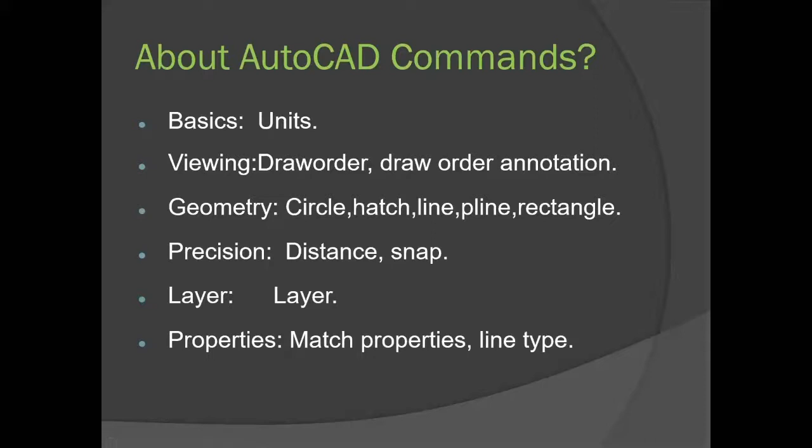These are some commands once you are used to with this software.

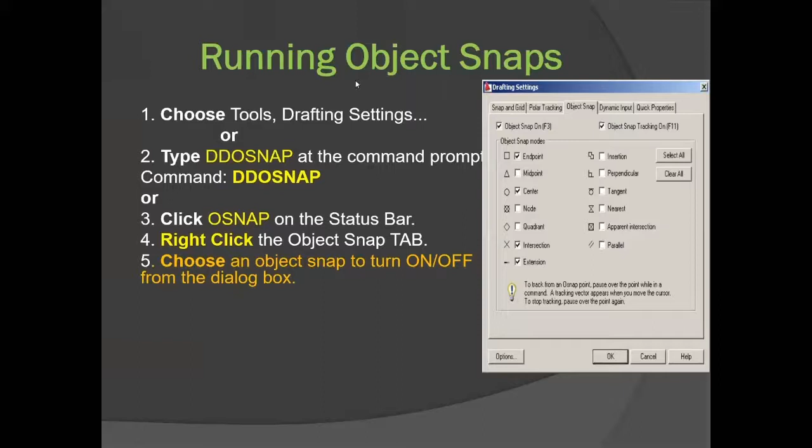Grid lines, sometimes we want to turn them on or off. I'll come to the exact software and show you. Meanwhile, you can text me in the chat box or note down your doubts, and whenever we come to the live mode examples, you can ask me.

We can set up our drawing units initially. Even in between we can change it, but it's always preferable to do it before starting the drawing.

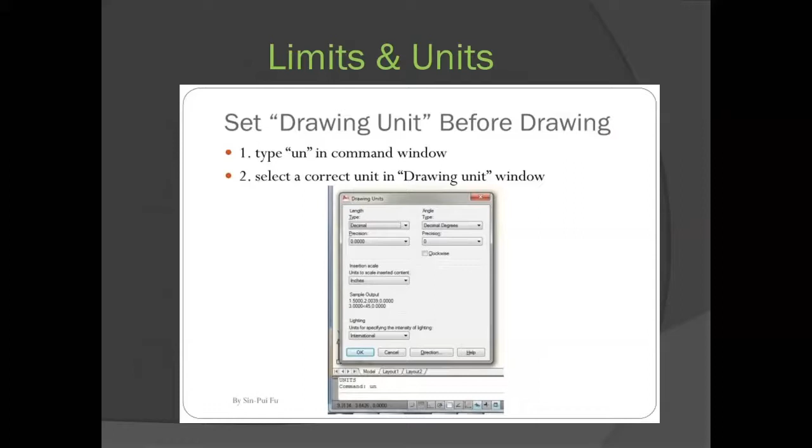So these are commands, as I said. For line, you just need to type L. For circle, you need to type C, this kind of stuff. If you want to come out of any command, press the escape button. And if you want to repeat any command, just press the space bar - the latest command will be repeated and executed again.

So have a look at these kinds of things. I will show you the live examples.

There are two kinds of coordinate systems. One is the user coordinate system, the second is the world coordinate system, which is the standard form. And in the previous slide, it was...

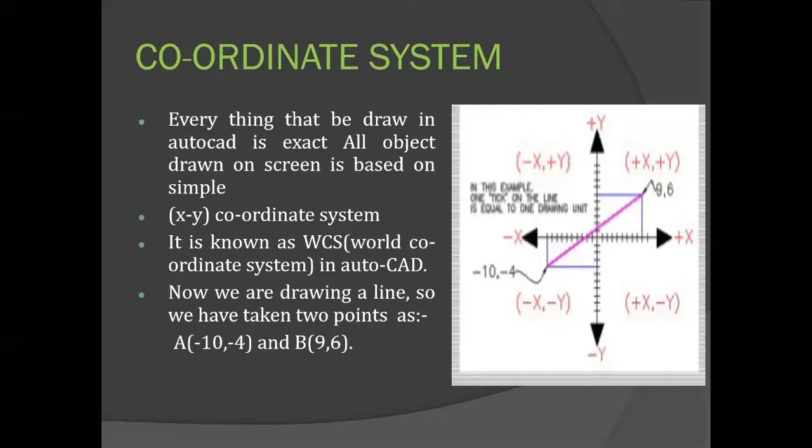There are various modes of input through which you can draw your line - different methods like relative coordinate, absolute coordinate, polar coordinate system, circle command. I will cover these things once I come to the exact examples, and then I'll be back to the live software.

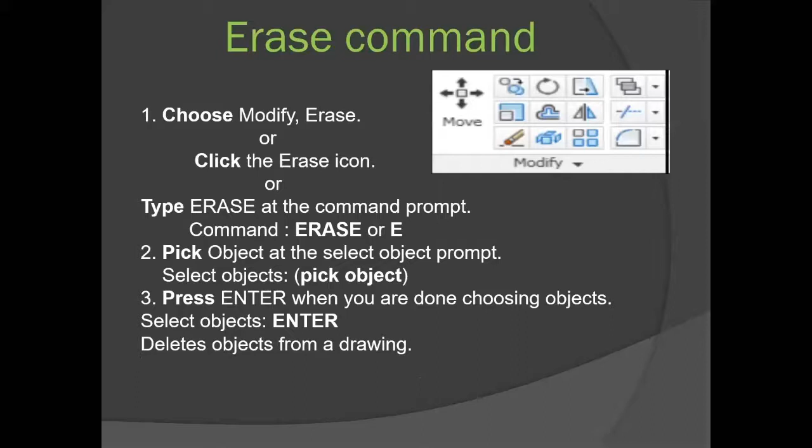You just see what all you can do. You can do mirror, offset - I mean, at some distance, again you want to repeat some drawing, then you can do offset. Extend command - there's some line and you want to extend up to some point, then you can.

Sorry, there was some technical issue. My internet connection got disconnected. Okay, okay.

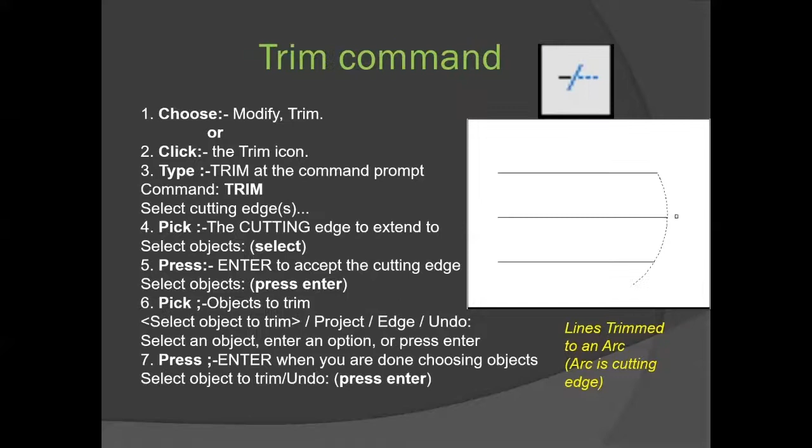So just have a look what all can you do. Move command, rotate command, or even trim, rotate, chamfer, which we use at corners and edges.

Fillet command, explode, like you have drawn a rectangle and these all four lines are connected, but at some point you want it to be disconnected, then just type explode. These lines will be counted individually, it will not be a closed line.

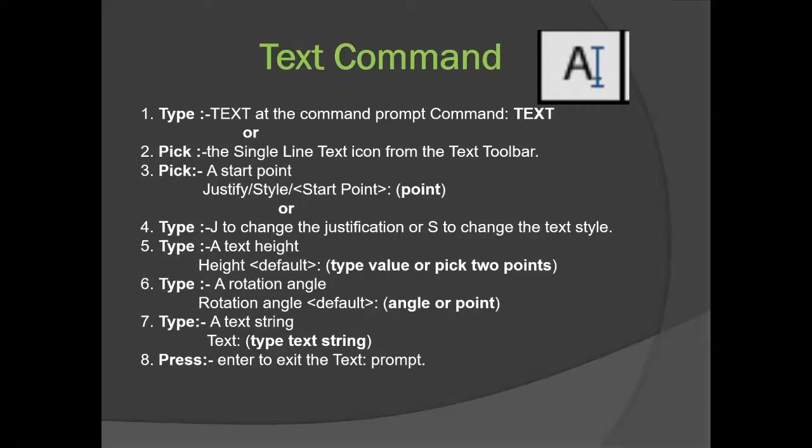Break at some point will create a gap. Text command, like sometimes we want to represent something, write nearby or add representations to make it clear.

Dynamic text also, it is fixed with that specific line. I mean, whenever you move that, it will be associated with that.

Hatch command, like you have to fill some material, then for representation we use hatching. Also we can edit that hatch.

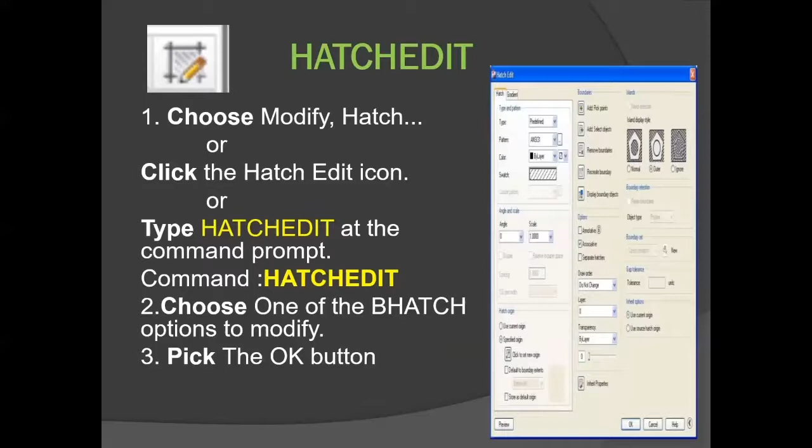Layers are nothing but, you can say, a drawing mode. Whenever we switch to another layer, within that layer we can specify dimensioning style, line style, viewing style, color. So suppose you are drawing 2 or 3 different parts,

then you should try to put each part in a different layer, so that whenever you need, you can put one off and another on. Whichever parts you want, you can put it off or on, I mean visible or invisible.

So also for appearance we can use this kind of things. That's why we use it, to create different layers for different kinds of things.

Like we have to put some hidden line, dash line, continuous line. Even for that we used to change our layers, so that all center lines will be red, all hidden lines will be black, these kind of things.

Then we used to have layers, just turn the layer on, turn the layer off, but initially we need to create that layer.

See, this is an example. You can have a better understanding.

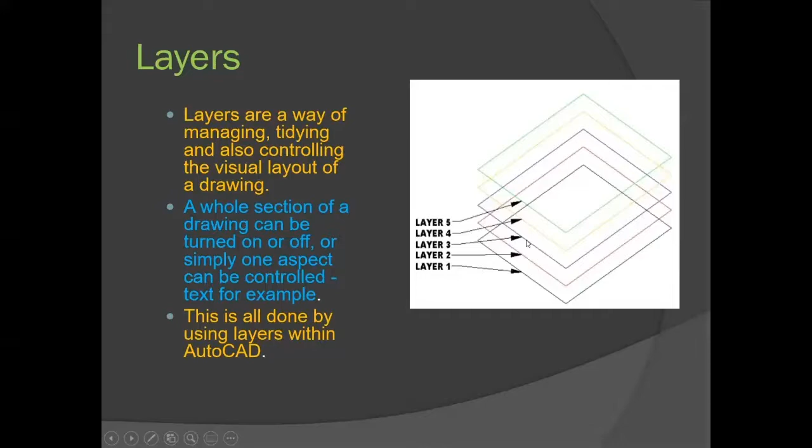See, with different lines there are different kinds of things we can set. Color, even the line type we can change for different lines, and from here we can turn it on or off.

Within the layer we can do a lot of things, as I explained you. Color, you can change the look or background color, or your image color, drawing color.

Blocks are nothing but, like suppose you have to use some standard things very frequently, then you draw that thing and save it within the AutoCAD software. And whenever you want to use it, just extract that and use it.

You won't need to draw it every time. Just save it and use it every time. So those things are called blocks.

Few blocks already come with this software, like nut bolts, because they have standard sizes. So those standard sizes come with the software, and if there are some differences, you can create your own block.

From the measure command you can measure the distance between 2 points. Like you have a doubt that someone sends you a drawing and that drawing has some different dimension, but it is written something different, because few people used to do that.

Just by editing they change the dimension, although indeed it is something like 3 centimeters, but it is written 4 centimeters. So to avoid that kind of confusion, you can directly measure it.

I mean area, volume, weight - if you are giving dimensions and density like things, then you can calculate all the properties.

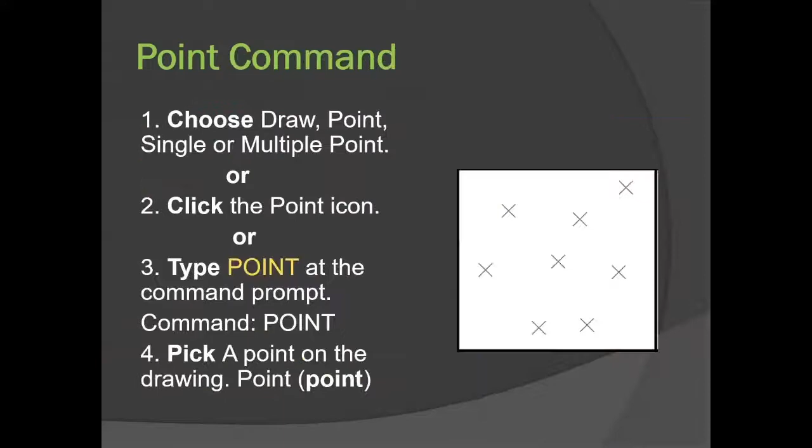These things come under styling. We'll tell you, if you have a detailed session, then in that session we will be telling you about dimension style, in which format you want to put your dimension - horizontal, vertical, or aligned with the lines. So all these can be changed.

Exporting, importing, plotting commands.

Okay, let's come back to AutoCAD.

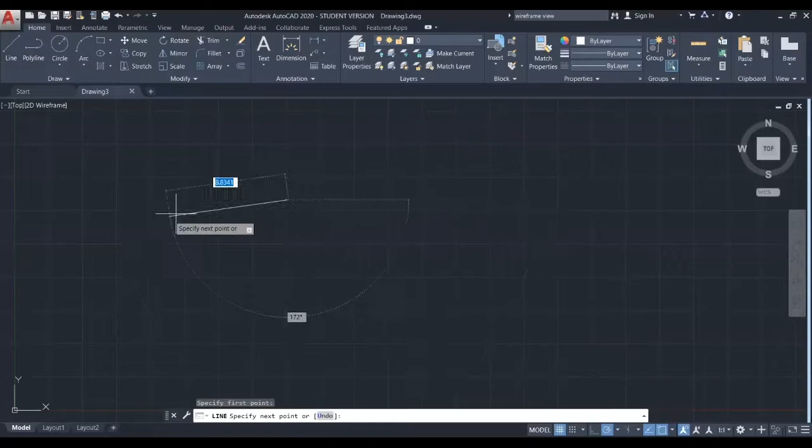Okay, the second thing is ortho mode. In orthogonal mode you can only draw either horizontal or vertical lines. Let's start. See, for now I can draw anywhere. When I want to draw a free line, anywhere I can draw it.

But when my ortho is on, see, I am pressing F8, shortcut key F8. This is the logo, this is the representative toolbar. Either press F8 or type 'ortho' and turn it on or off. When ortho is on, see again I'm drawing the line, but it will either go vertical or horizontal, not in between. Even as I'm placing my mouse, it is not accepting that. It is either accepting horizontal or vertical, not between these. Again, when ortho mode is turned off, see here, it is turned off.

Then I can draw anywhere. See, anywhere I can draw, horizontal, vertical, whatever.

Now there are different types of modes of input. You want to put some point like polar coordinate system or relative, absolute, these kind of things. So like when I want to draw a line, suppose I can either place it with the mouse, or if I want I can directly give a coordinate. Suppose I have selected this line.

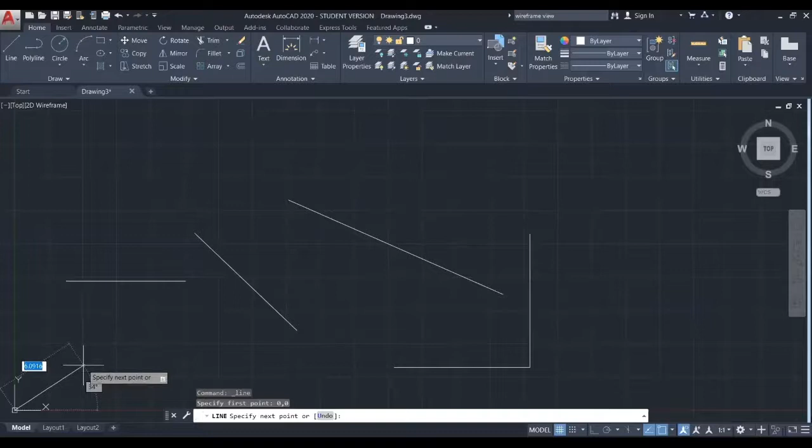Okay, then how to enter the coordinate. So it is saying specify line's first point, so I can say, just for your reference, 0, 0. See, it has taken the first point of the line at 0, 0. Again I am giving the next coordinate like 10, 10. So it is taken here. You can see this, 10, 10.

Again suppose I am saying 10, 0, meaning in the x direction 10 units and in the y 0. Mind it, these are all absolute coordinate systems because I'm not putting the at-the-rate symbol. So it will go to 10 and 0. See, this is 10 and 0.

Again, now I am entering the polar coordinates. So 10 at the angle 90. Okay.

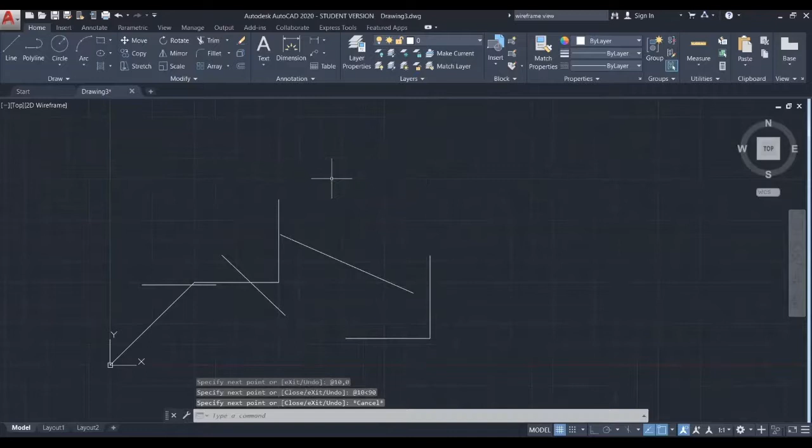There are two types of selection. One is from right to left. When you are selecting from right to left, whatever objects are touching that selection area, all of those will be selected. But when you are selecting from left to right, then whatever drawing is completely inside the box will only be selected. So this is the difference. If you are selecting from right to left, if it touches any segment, that will be selected. But when you are selecting left to right, it will select only if it is completely inside the box. Even if it is outside a little bit, then it will not select.

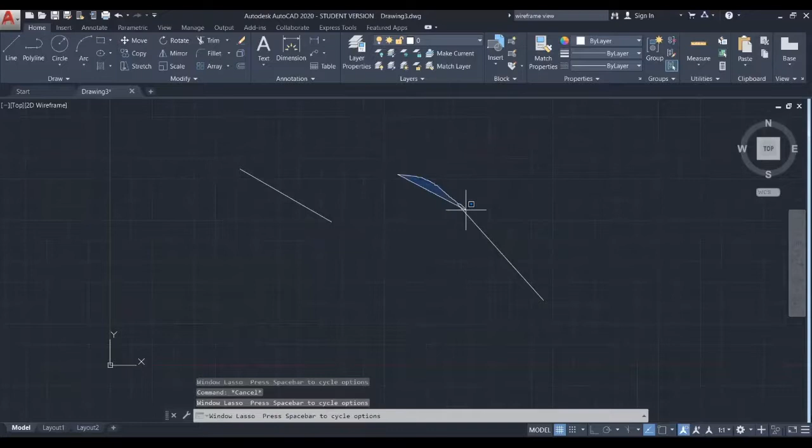See, it is not selecting, but if I'm doing like this, then it is selecting.

Let's start with some drawing models. So start with this. These are different viewports, like from top view, side view, and this one is the 3D model.

So for this 3D model, we can have these dimensions. This vertical thing is the top view, so this side is 2 and the length is 3. This face view is this one, so the height is 2 and this length is 3. So let's draw two lines with 2 and 3 units.

I will go to the line command and start with any point, and then I will draw this 3 at angle 0. Only the line. See, this is the 3-unit long line, and then this height we can switch to this image.

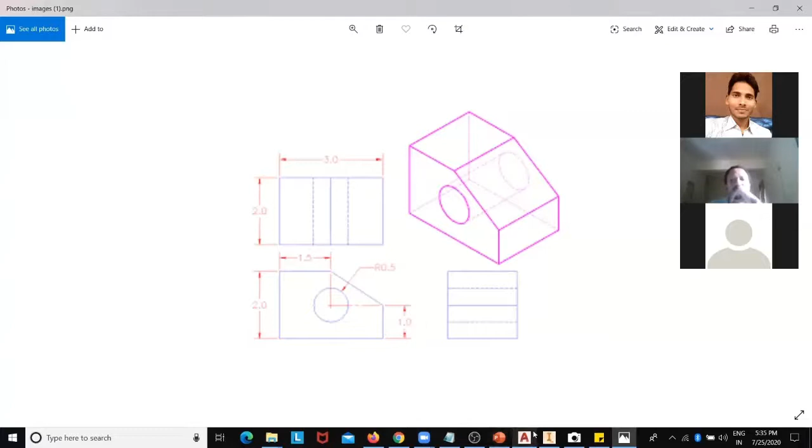So in this image we are drawing, this height is 2, this is 3, and this one is 1. So I'm drawing that. This one is 3, and then this one is 1 at rate 1, comma, angle 90 degrees.

This is snap on, that's why it is taking already that line point. If snap is off, then it will not select that point. So I will select this point, relative coordinate system, length is 1, angle is 90 degrees. Okay, I will terminate this command here.

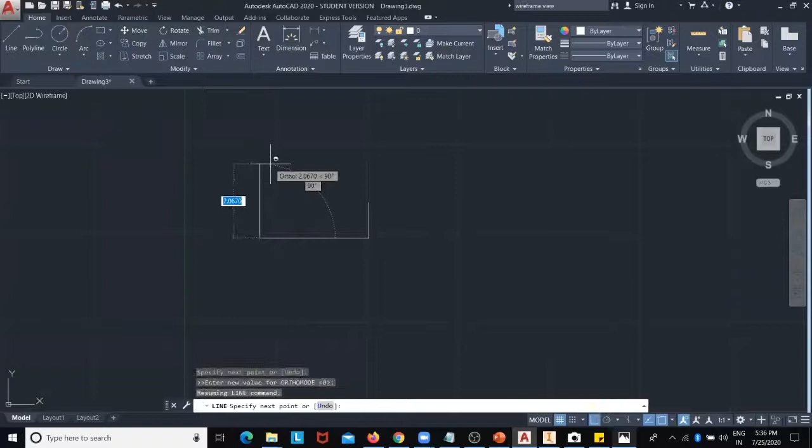Again there is a command, a line with length 2 units. So I will just select this point, again relative coordinate system, at rate 2, angle 90 degrees. See, and this length again we will switch to this, and this length is 2. From top view this is coming.

So sorry, this length is 1.5. So at rate 1.5, angle 0. Okay, and match this point. Okay.

And the center of the circle is at 1.5 centimeters from this side, and from bottom it is 1 unit. There are a lot of ways you can go through that. The simplest is I can just draw a vertical line and a horizontal line from here in ortho mode. So F8, ortho is on, and then draw a horizontal line.

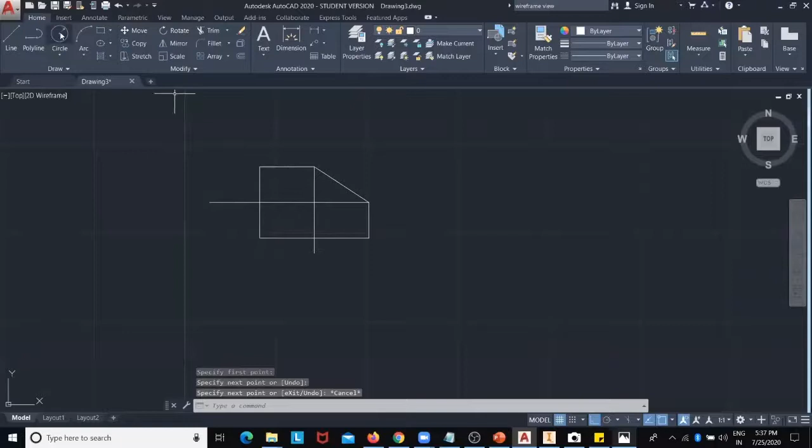Again repeat the command, and from here draw the vertical line, and then we can find out the center. Draw the circle. This is snap. Let's repeat. When I'm putting the snap mode off, see, I'm pressing F3. See here, object snap is off. Now, whenever I'm in the command, it is not accepting, it is not popping up that point. But when I'm pressing F3 again, see here, OSNAP is on, and now it is accepting that point.

So I have selected that center point, and diameter is - refer to that image - diameter is 1, radius is 0.5, so diameter is 1. See, and now we can delete those lines.

So this 2D image is ready. Now we can extrude it, then it will be converted into 3D. Just type here extrude. No.

Before that, we see our lines are independent. These are not connected. So we need to close it first, because we can extrude a closed entity, not an open entity. For this, we can edit polyline. To edit polyline, the command is PE, polyline edit. Select any line, and then enter. Turn into one, yes, Y, and then what you want to do - so we want to join it, and then select all the lines you want to join into one. Selected. So all are selected, and then just press enter, either from mouse or directly press the enter button.

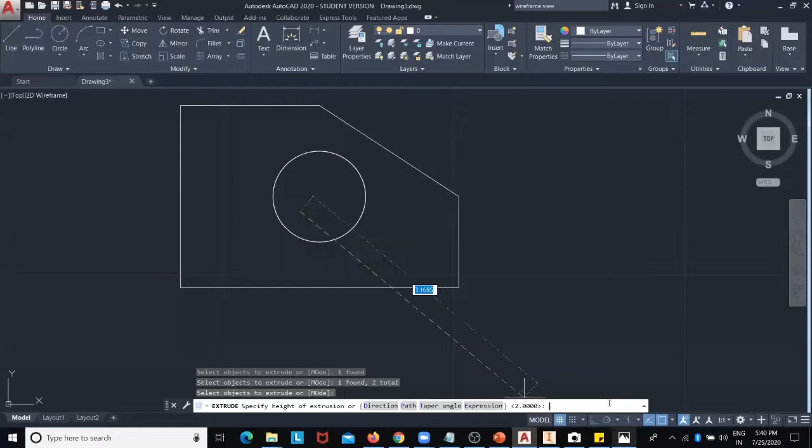So it has been extruded, but to see it, you have to rotate it because it is in the top view. So only this view you can see. From here, you can orbit, I mean rotate it, and you can have a wireframe model of this 3D drawing.

If you want to change the viewing style, then just press here. See, for now it is wireframe. Wireframe means it is representing the edges with a wire line. So click here, and have a realistic view. In realistic view, you will see like this. Okay, there is not a hole.

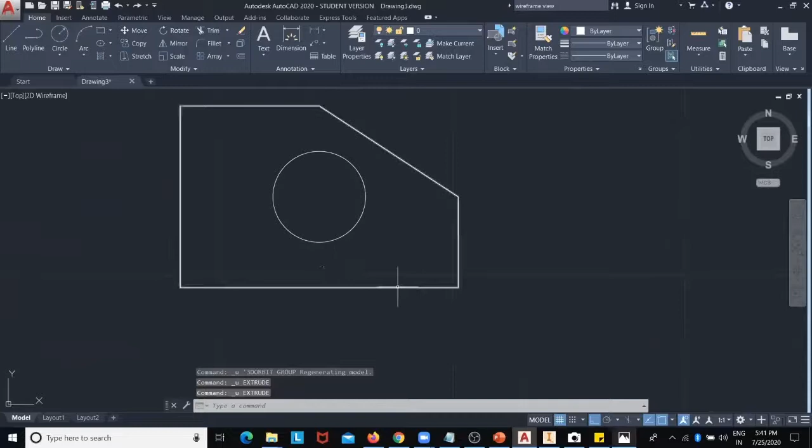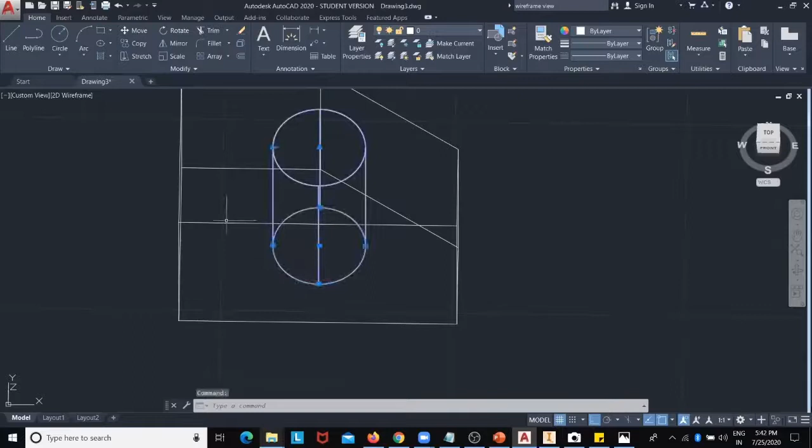So, extrude, and then extrude this one again. You can subtract this extrusion from this main extrusion so that you can have a look like a hole in this. For now, we have added, we have not subtracted.

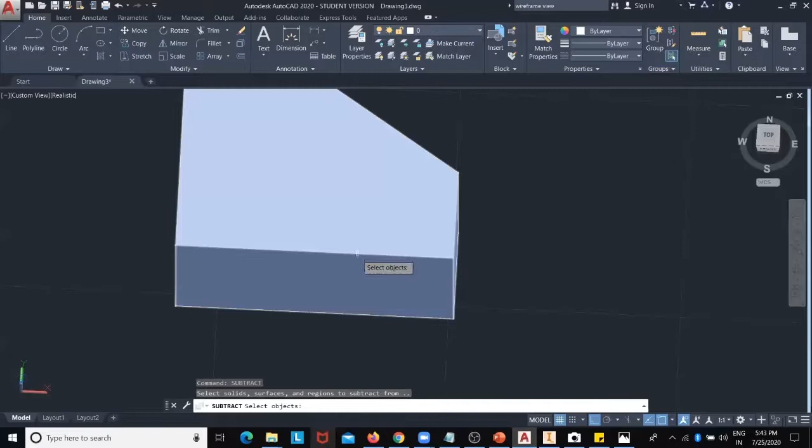So subtract this extrusion from this one. Select solid to subtract from. We have to select first the bigger one from which you want to subtract. So from this we want to subtract. Now select the region which needs to be subtracted. So this one is to be subtracted.

Now you can have a look. It has been subtracted. You can change the viewing style from here. You can have a shaded look. You can have a conceptual look. Different kinds of views you can have.

Now, if you have any doubt, you can just ask me. Of course, we're not having a detailed session, I'm just introducing AutoCAD to you. If you are all interested, we can have a full lecture series on this. If you have no doubt, I can tell you a few more commands.

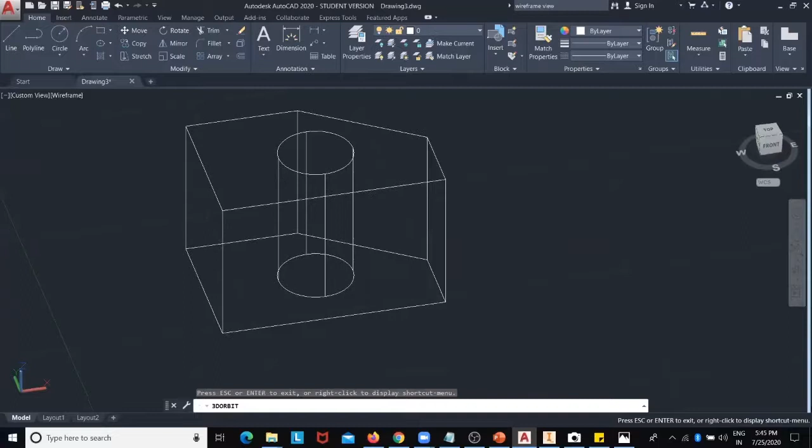When you are saying the layers of 3D printing, that is a different thing, and layer in AutoCAD is a different thing. If you are talking about people using this program to make 3D structures in realistic printing scenarios, yes of course, this is a 3D model, and you can get it printed. For that, you have to export it in some different format. So from here, you can export it.

Let me see. And for 3D, as far as I know, you use the .stl format. Yeah, see, this is the .stl format, stereolithography. So from here, you can export your drawing into .stl format and just go to the 3D printer and hand it over. They will give you the printed version.

Even in this, there is some different kind of selection, like high density, low density, a lot of things. So those aspects are different aspects from 3D. And if you are talking in terms of a layer, even then you have to draw in a different mode, because if you have drawn it in a single layer mode, it will not put different kinds of stuff in various layers. All this thickness will get printed in a unique fashion, it will not change like you want the density or pattern to change after some distance. For that, you have to put two layers at the same point, then it can be done.

In AutoCAD, a layer is like having different entities in different modes, like color or line thickness. Suppose I have to put a rod shaft here, then obviously I will try to put that in a different color, different material, these kinds of things. So I will try to draw that shaft in a different layer style. This is basically layer in AutoCAD. Okay, thank you.

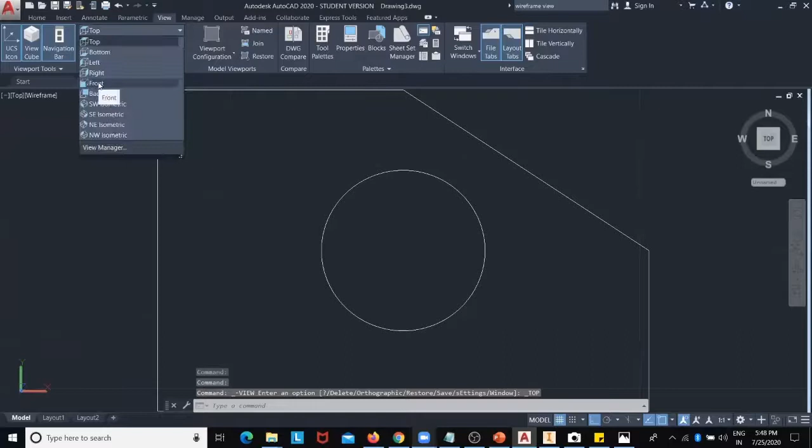Someone has asked about the views. From here, just go to the View menu, there is direct access here. From here you can select top view, front view, bottom view, whatever you want, and have different views.

There is a command viewport, like if you want to print something and give it to students, we use it on the same sheet at specific locations for the front view, top view. So this is a different thing.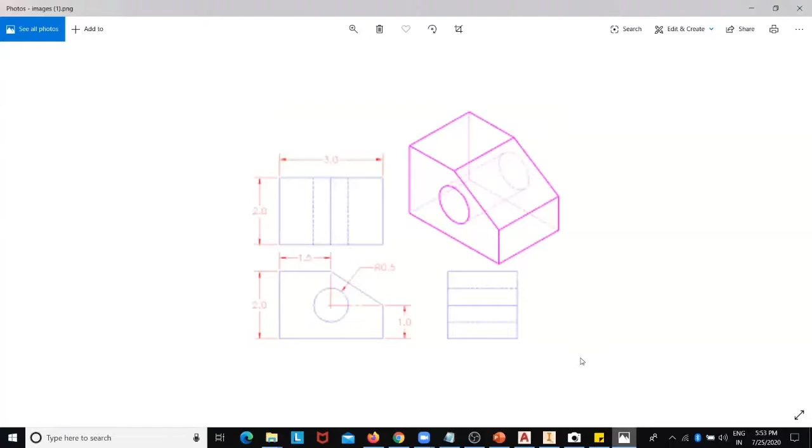I think this one is simple. Can you see this? You can try this model.

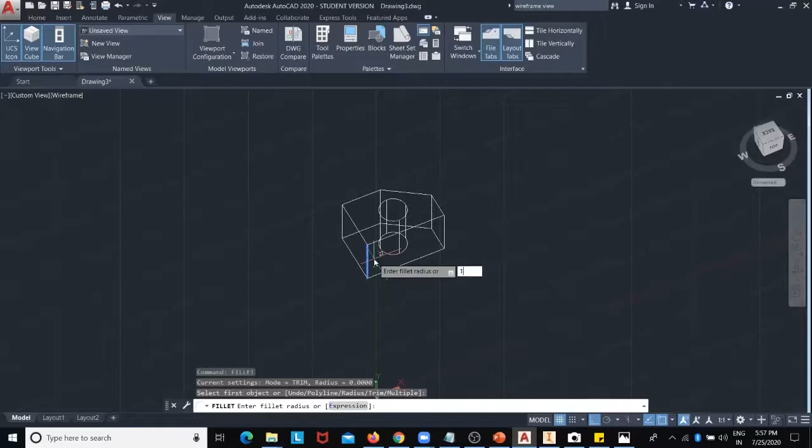I can select more edges, suppose this one also. Let's select, then enter the fillet radius, whatever curvature you want at this edge. Suppose I enter 2 — no, 1, because this dimension, this height, is itself 2, so 1 is too large for this fillet. I'll use 0.2.

Let me change the view so you can have a better look. See, these 3 edges have been filleted. Okay.

This is the fillet command. Now let's try the chamfer command. Type CHAM, then select this chamfer command. So this is what I'll be selecting for chamfer. I have selected chamfer. Select first line, this one. It has been selected, this surface.

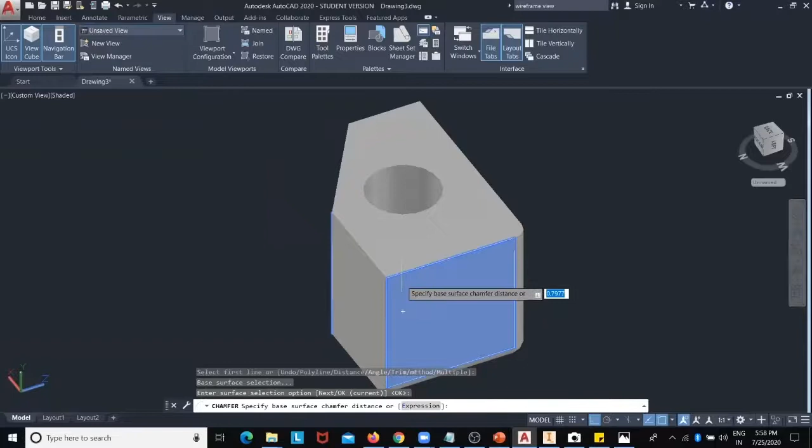I should select chamfer surfaces. Okay. Specify the other surface chamfer distance, 0.2. Select an edge.

There is some error. Chamfer command. Selecting, okay.

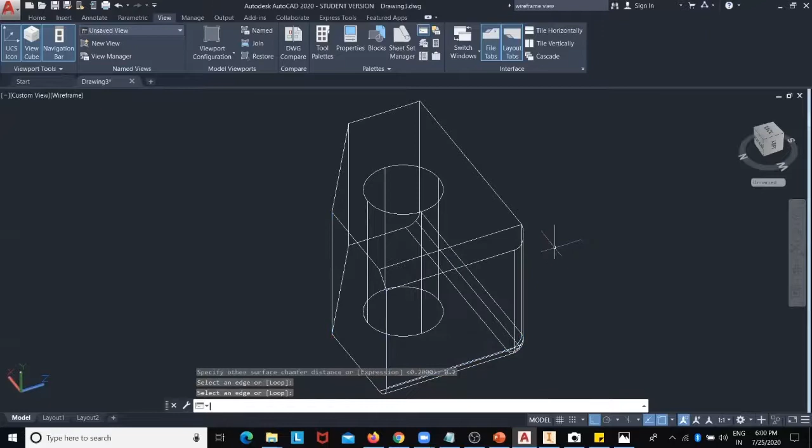Specify base. So from this side, suppose I want 0.2 mm chamfer, and other side also 0.2 mm at this edge. Now the chamfer is 0.2 mm from both sides. It means at this rectangular edge, 0.2 mm has been cut from both the sides.

I can change this, I mean it can be different - 0.3, 0.2, 0.5, 0.1, whatever different size you can select, or same size, whatever you can. This is chamfer. For a better look, let's switch to this rendered mode. See, this is chamfer.

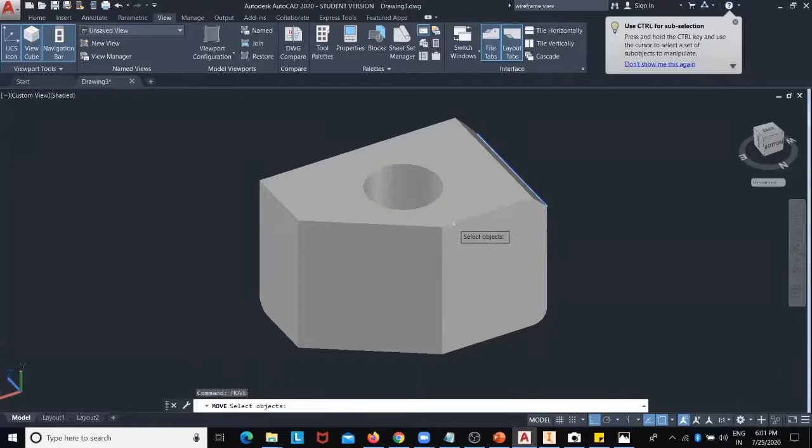Okay, and again, like move command, just select object, enter, then specify a base point. You can have coordinates, or you can just click on a point. So I have clicked here. So this is the base point. Now I can enter the displacement, or I can manually drag it. See, this is move command.

Mirror is also there. So this object at a mirror line - okay, I haven't drawn the mirror line, so just I can draw now first. So I have drawn a mirror line. So about that, it will be doing mirror, and then it is asking: do you want to erase the source object? No, of course. If there is a mirror image, exactly same - it has been mirrored. Okay.

Again, there is a very popular command, offset. Like you have drawn a line here, and you want to offset, means at some distance you want to redraw it. So just type offset, offset. Okay, offset distance - at how much distance you want to redraw it?

Okay, so just draw this image with your pen, and then you can try at your own after the session - just draw in your notebook. Then I'll be switching to the next software. This is Autodesk Inventor, which is ideal for 3D.

Any doubt? Am I audible? Yeah, you are audible.

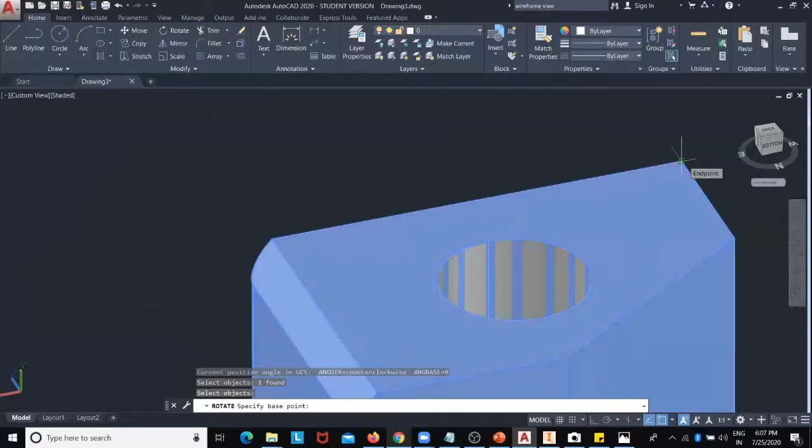Like if we want to rotate an object at 360 or at any angle, this 3D object, how can we do that? Type here: rotate. So for rotation of this object, use the rotate command and then select the object. You can watch on the screen - I have selected the object, and then I can select any point. There must be a point or reference point about which you want to rotate it. Suppose this point I have selected - see this corner, I am taking it as reference - and it is asking about rotation angle.

Rotation angle I can give it, so suppose I am putting 180 degree. So first you can have a look of the previous image. I'm starting again - so this one is the base drawing. Now I'm rotating it, please remember this model.

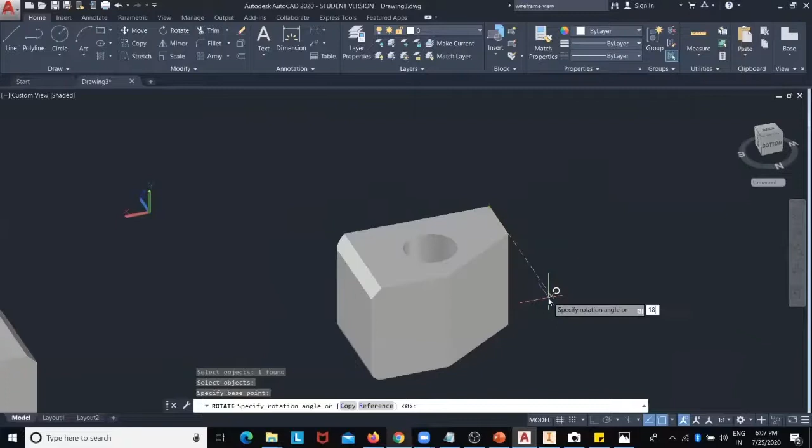Rotate, because this will be changed. Select the object, enter, select the edge, and then angle 180 degree. See, initially this edge was this side, and it has been rotated 180 degrees - it is just reversed.

Are you getting me or not? Yes, definitely. Thanks.

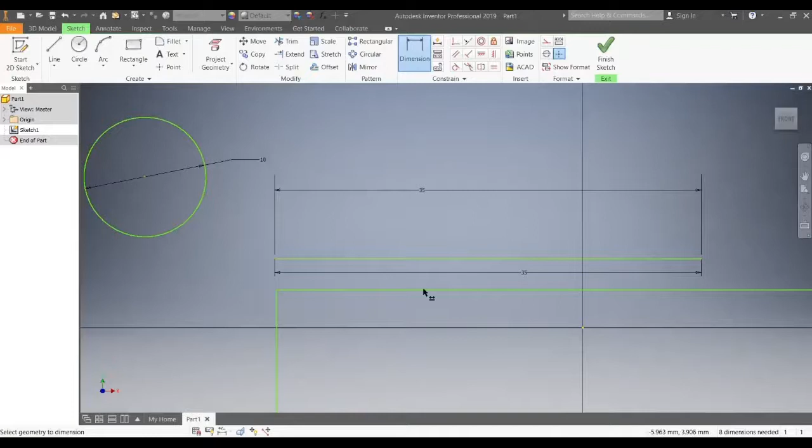Similarly, for this rectangle I can select this dimension, I can put it 20 suppose. Select this dimension, I can put it 50. So let's delete these things and work with this rectangle.

Now if your sketch is finished, just click here. Now you can do 3D operations, like you want to extrude it, just click here. It has already selected that because there is a single closed entity, and it has selected that closed area, and it is asking you for the extrusion height.

So whatever height you wish, you can give it here. Suppose 10 mm is okay for me, so just try 10 mm. And the extrusion direction also you can change, this way or the back side, or both sides. So it will divide 10 mm equally into two parts. If you want both sides to have a different value, then you can change it. See, this one side is red and blue, meaning there is a different size.

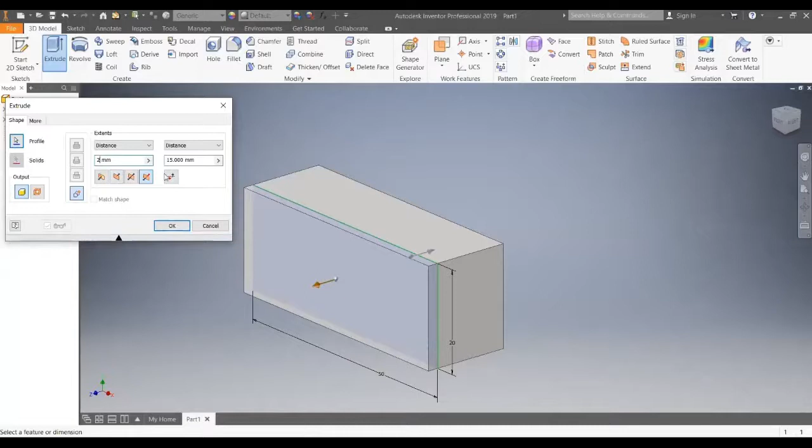So if you want the back side, suppose 15, see, the back side increased. If you want to put the front side at 0, then you have to go on this second command, suppose you want 2 mm, see, this one reduced. Okay, but now we will be having only one dimension, only one direction. Suppose 5 units, click here, it has been extended by 5 units.

Again, if you want to draw something on this face, just click here. Go at this face, this face is selected now. Suppose here I want to draw a pillar, draw here. You can always change your dimensions. This is the advantage here, and it's very fast, I mean direct access.

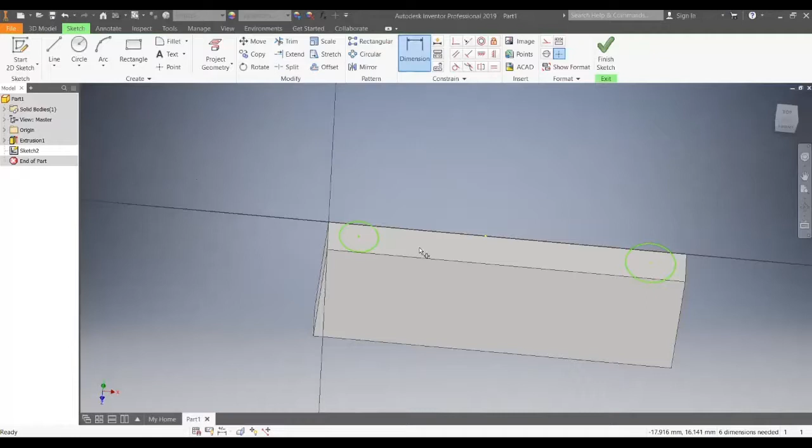Put the dimensions. Oh, one more thing, you can project this face as well, so it will have it as a drawing, and you don't need to recreate it. So project geometry with geometry, so this geometry, because at this face we are drawing, it is projected now.

Okay, I want to put this circle of the same size with this surface, so I will put the constraints. So let's make it tangent, this one, and this one also. Okay, and put it here as well. See, this is constrained now. It is fixed because a circle can have a maximum of 3 tangents, I mean maximum 3 points, and no entity you can change. These are some geometrical things, constraints. Again, we can do the same thing here as well.

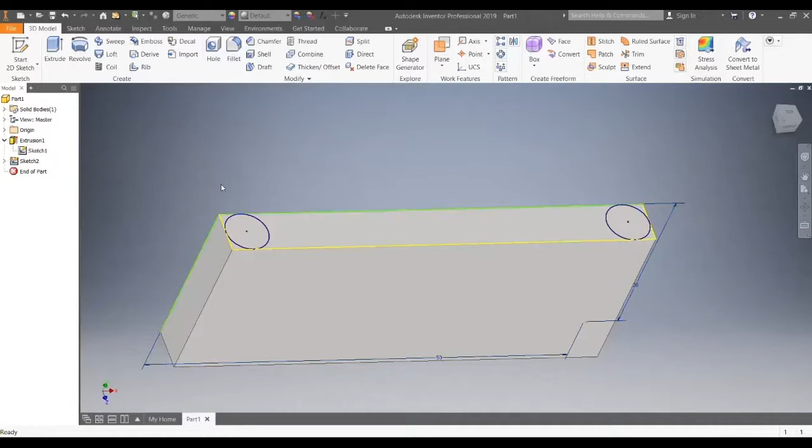Okay, let's reduce it, and then we can change it. Finish sketch. You can show this dimension as well, or even if you want to make it visible, just click here. It will be visible - our first sketch will be visible.

But why keep it visible? Just make it invisible. Now this you want to extrude, just click here, click here. Give whatever height you wish - suppose 15mm I want. This is the extrusion height I can give, and at whatever face I wish I can work.

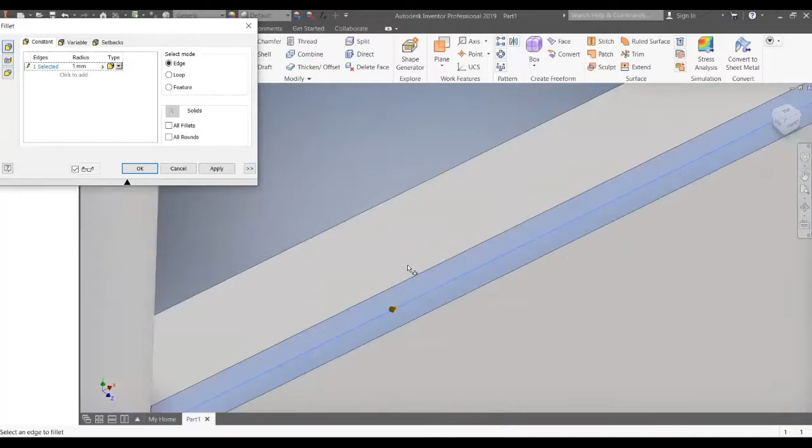Alright, let's come back to fillet. Just click on fillet, select the edges, and select the fillet radius. For 1mm, see it is fillet. For a better look, you can put it 2mm - see, this one also you can change. See, it has been filleted.

Okay, let's do some example. So this one is the example. So just go to this - this is the side view. From side view, what you can see is this one is 11, then 14, then 17. So I start with the initial one.

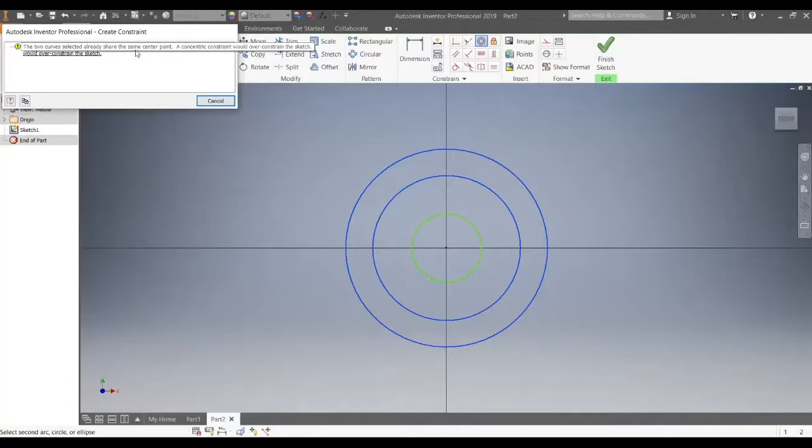See, although I have selected the same center, so obviously these three circles are concentric. But if you have any doubt, just click on this constraint - there are a lot of constraints, you can select any one. So I'm making these circles concentric - this concentric constraint, I'll go into that and select these circles. See, already I had selected that, that's why it is showing that it is over constrained. The two curves selected already share the same center, meaning already I have drawn it such that the center point is same. So it is just for checking - okay, so it is already concentric.

And dimension, again you go back to your image and the dimension is 11, 14, 17 as the radius. So as per this 11, 14, 17 - 17 means 34, and this one radius was 14, so we can put 28 in diameter, and this is 11 means 22.

What else? After this, there is a main huge cover - I mean you can say this collar. In engineering terms, mechanically we call it collar. So this is having 22.5mm radius, 22.5, 45. So again, draw a circle here, take it 45.

And this extrusion, the bigger one is 3mm and then 5.5. First, okay, finish the sketch - we can edit as well. I will just tell you how to edit.

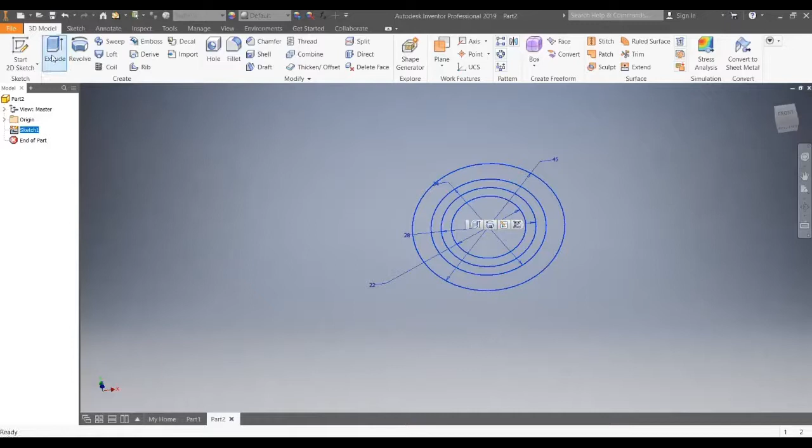Extrude this one by 3mm.

This is extruded, but all other sketches are not visible. So go to the sketch here and make it visible. Now the inner one is 6.5.

Add it - there are three options: where do you want to add it, or subtract it, or only common points. So the three modes you can put whatever you want. So I have joined it, meaning whatever the previous 3D model, it will be joined with that union.

Okay, now the initial first height of the first layer is again 3.5 - see, this is the side view of this, so side view will tell you the height, and this is 3.5mm. So again extrude, select this inner area, union mode, 3.5.

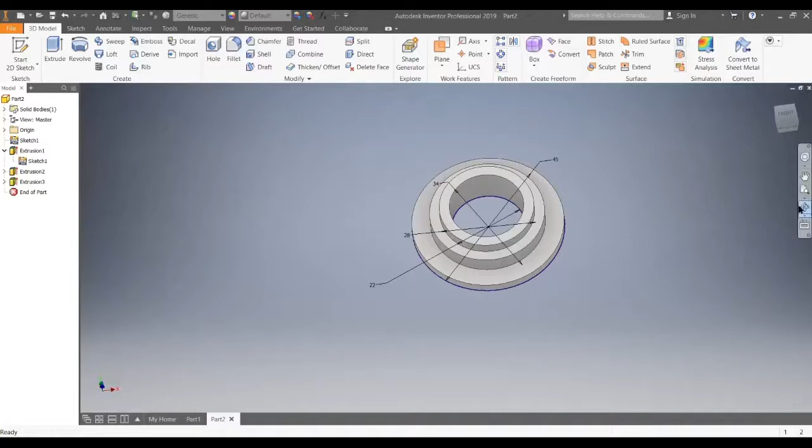Now, there is a circle of 2.5 and 6 at this outer edge. This is 26 and 52.

Let's edit the first sketch. There is a circle of the same center and 26 radius meaning 52 diameter.

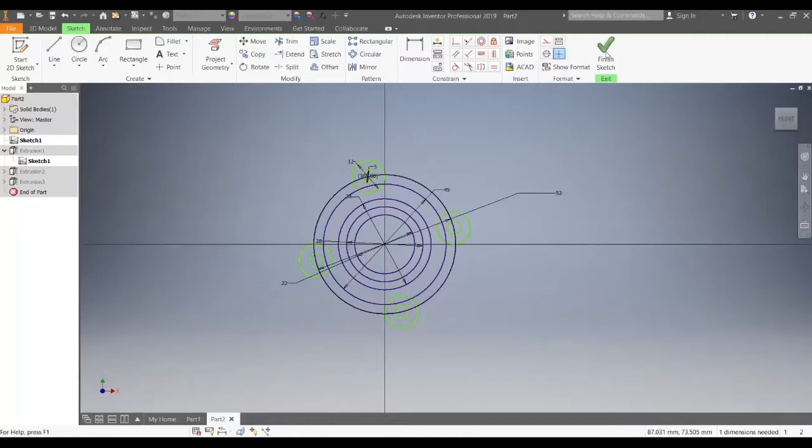So the first extrusion, edit this feature, and then select - let's go to the profile, then select this one, this one, this one, all these 4 new areas, and this as well. And then click OK.

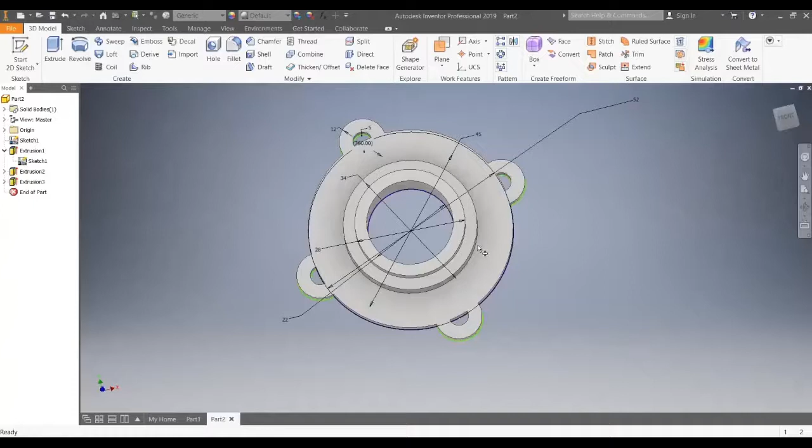Now we can do fillet here - just go here, click here, here, then rotate it, click here, click here, select this point, this one. So all the edges we have selected, and now put the radius as per the drawing - radius is 7. So fillet radius we will put it 7. Click on OK.

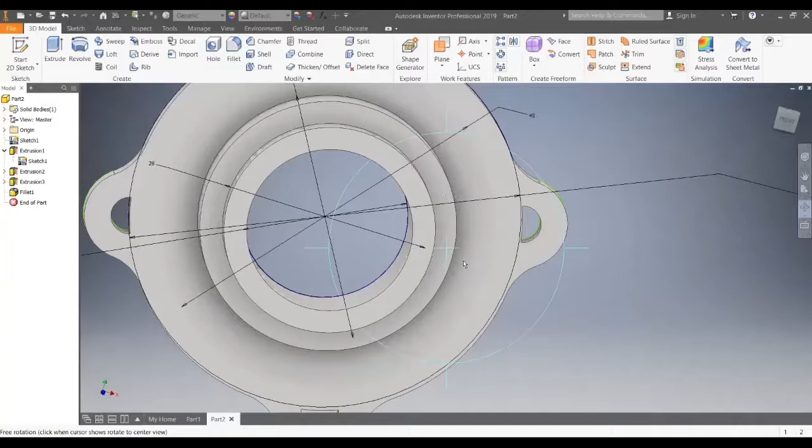Make it visible. Extrude command - this one. All these 4 inner circles, and then click on OK, so it will create a hole, and then we can again put it, hide it.

Now it is hidden - see, this one is exactly what is given here.

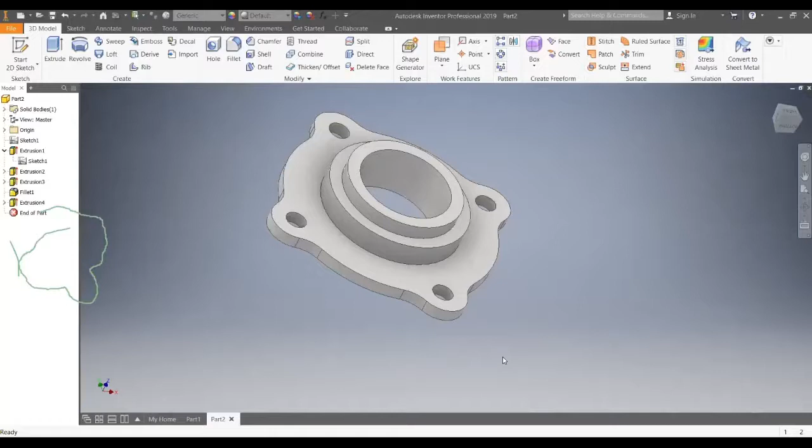Okay, let's proceed. Now let's draw this one. This one is much easier than the previous one. So there is a circle of diameter. Phi represents diameter and r means radius. So it has 16 diameter and the central distance is 15.

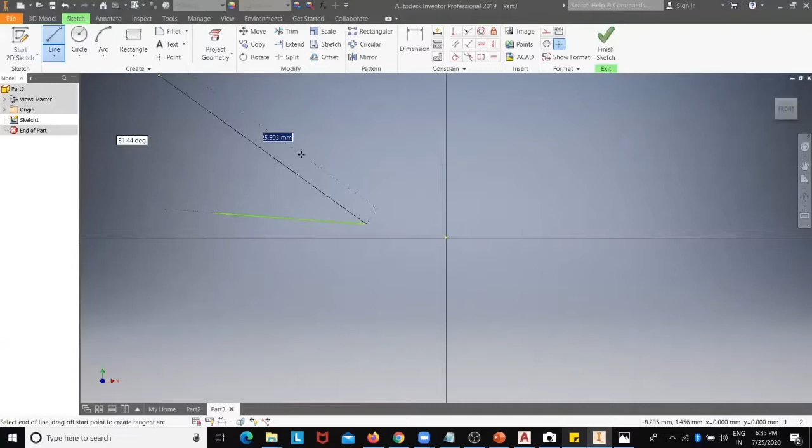Before that, let me introduce a few more commands in the same drawing. Let's start with some new drawing. Circle, line, rectangle, whatever - we can select different kinds. See in which fashion you want to put your input, whatever data you have. As per that data you can draw arc, tangent or center point, whatever mode you have, 3 points. So in this fashion you can draw.

Now there is a command extend. Extend means extend an entity up to the next close entity, closer to that, and it will keep on extending. Suppose I click on extend - see, it is taking it up to this circle. Again I clicked, so it reached there. Again if I extend it, it will go there, and it will keep on extending.

So the purpose is, suppose I have drawn a rectangle here and a line here, but unfortunately it is not touching this line - there is some mistake. In that case, we can easily extend it and it will touch there. So sometimes, to make us sure, we use this extend command, and it will reach up to there, and we can even increase beyond that and then use the trim command.

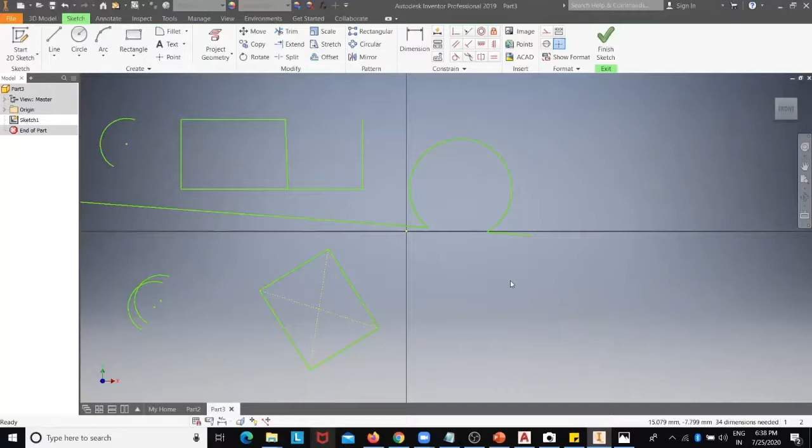And next, the rotate command. Suppose I want to rotate this - select it and then set the center point. Suppose this is the center point. See, it is getting rotated. This was the initial position, and this is after rotation. It shows the angle here, or you can manually enter it if you have an input, like 90 degree - it has been rotated by 90 degree.

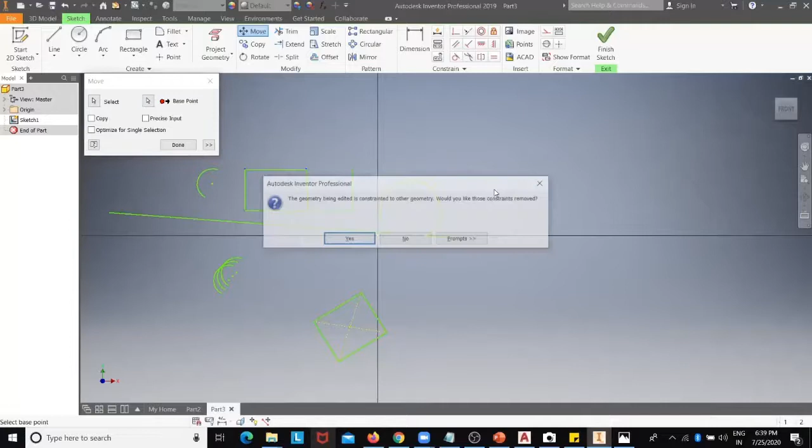So the move command - just click there and select the entity you want to move, suppose this drawing. After selection, go to the base point, select it, put it anywhere, click like I have clicked here. So this will be my base point, and then I can give a distance and manually drag it there, so it will be moved.

Then scale. Scaling is nothing but multiplying, reducing or increasing the size. If I select the base point here, then this point will remain here and it will scale up or scale down. See, it is scaled up, scaled down. And I can put the value here as well, like if I want to make it 2 times larger, just enter 2, and it will be exactly twice.

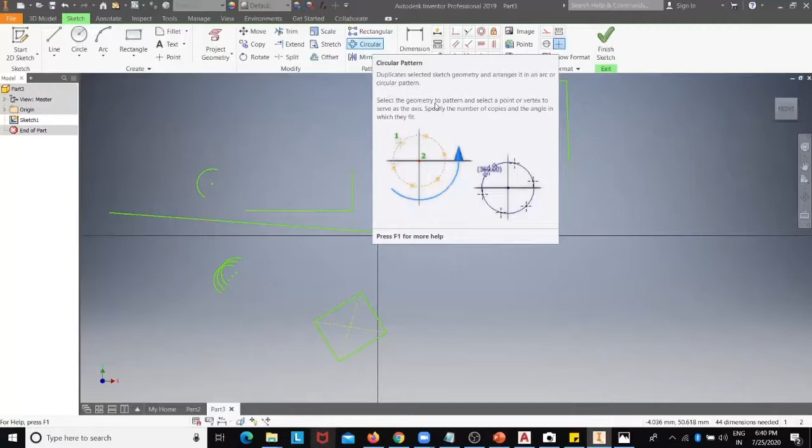Done. This is array - rectangular array or circular array. Even within that array command, you can choose whether you want to rotate the main object as per position, or keep that orientation same for all the places. So these are all the things you can do with that.

Mirror - click on the mirror, select the object you want to do, suppose this circle, then mirror, then select the mirror line. Suppose about this line I want to make it mirror. Apply - see, it is mirrored now. Done.

After a sketch, we can click on finish sketch, then we can do 3D operations. Let's try this one, the sweep command. Sweep is nothing but there is a cross-sectional area and then there is a path - along that path you pull that cross-section and it becomes a 3D model. A very good example of that, let me show you.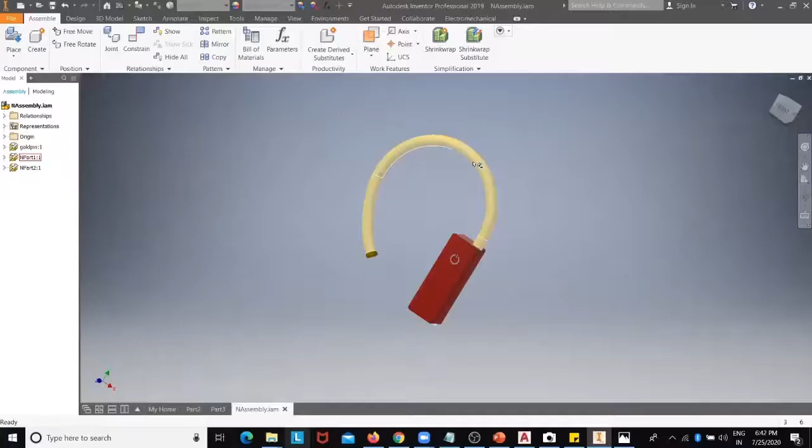See, this has been created by loft command, by sweep command. There is a sketch - this is the path, the blue line you are seeing. This is the sketch, and this is the path, and this is the sketch. See this circle, this blue circle, this is the sketch. There are 2 circles, meaning it will be sweeping only the area between these 2 circles, so there should be some hole in this. See, there is some hole, and this is a separate entity, and this is actually an assembly file.

So I'll show you here again. Suppose there is... let's draw a new one. Start 2D sketch, create a circle here. Okay, then finish sketch.

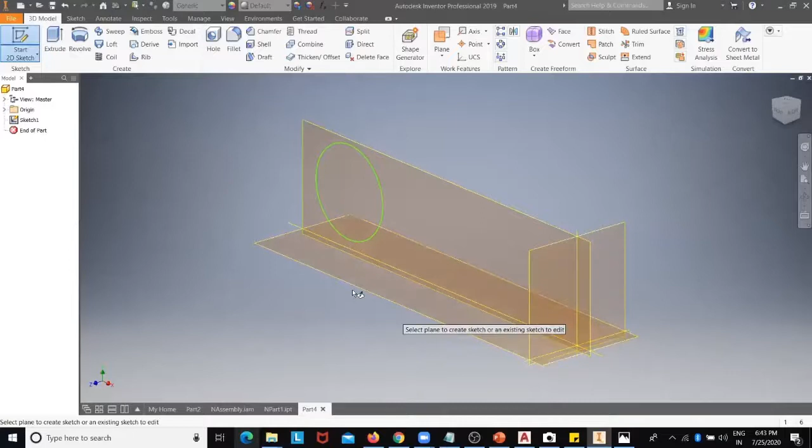So this one I have drawn on XY plane. So obviously I should create the profile, the line, the path of sweeping at a perpendicular plane. So this time I will be taking a different plane. See, the planes are showing. So suppose I am taking this plane and drawing just a polyline, not a straight line. See, okay, this is a polyline - spline also we used to say in engineering terms. Finish sketch.

Now I have a line, a path, and there is a trajectory, there is a cross section you can say. And then you can go to the sweep command. So first here, since profile, this one is my profile, path, this one is my path.

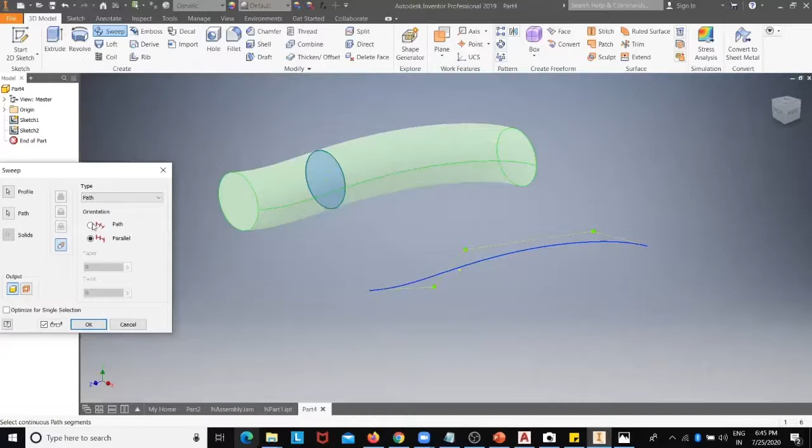So about the path, do you want your cross section to adjust? Then you will say this path - as per path, I mean the cross section will always be perpendicular to that path. If you want to put your cross section always same, then you can say parallel. Means this cross section plane will never change - the circle will always be in that same plane. Plane in the sense, if it is circle is vertical, then always it will remain vertical. And if you are setting as per the path mode, then it will be changing its orientation.

So this is the sweep command. Again, there is a loft command. Loft command means - see, generally extrusion is just a 2D surface extruded, then it becomes 3D. There is some technical issue, let me fix it. Okay, but in loft command, two different cross sections you can join it. Let's see it - sketch.

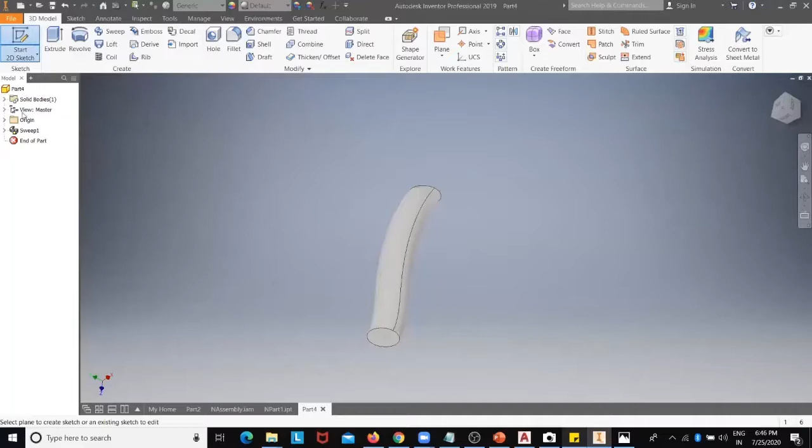From here, select any plane, and then suppose I'm drawing a rectangle here. Dimension I can put it 15. Okay.

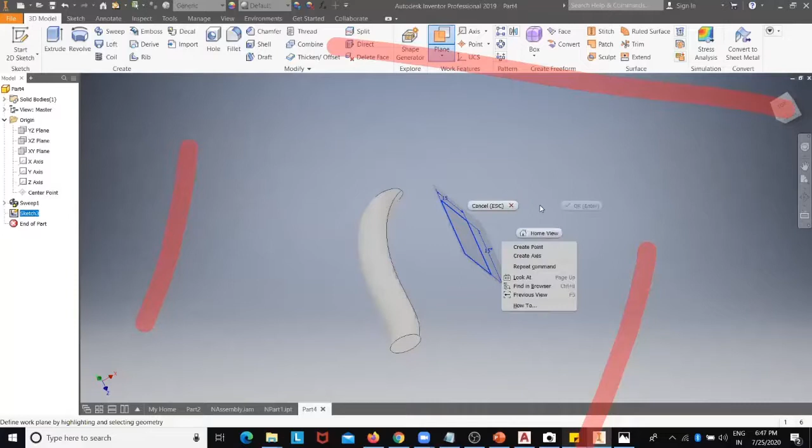Again, I will select a plane, a different plane parallel to this. At some distance, suppose 30 mm distance. So another parallel plane I have got. Is there any problem?

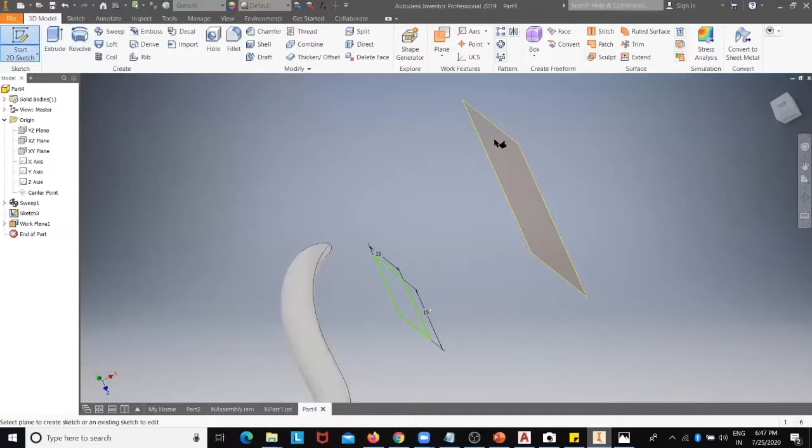Now on this plane, I will draw a different rectangle, and let's make it a bigger size. Put it 30 and 30. Okay, finish sketch. Now let's connect it.

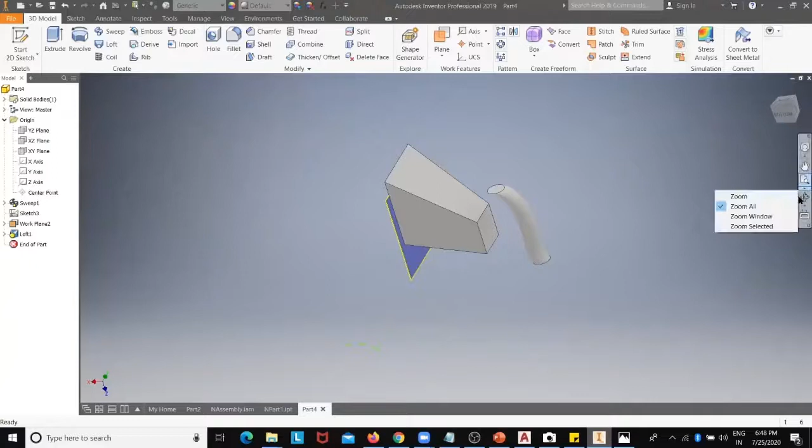See, there are two rectangles, and with loft command I will be joining it. Loft this first cross section, and then second cross section. Click on OK. Now you can have a look - it has been joined in 3D. Image is created. I can hide this plane because we don't want to see the plane. Now it is hidden, you can have a look.

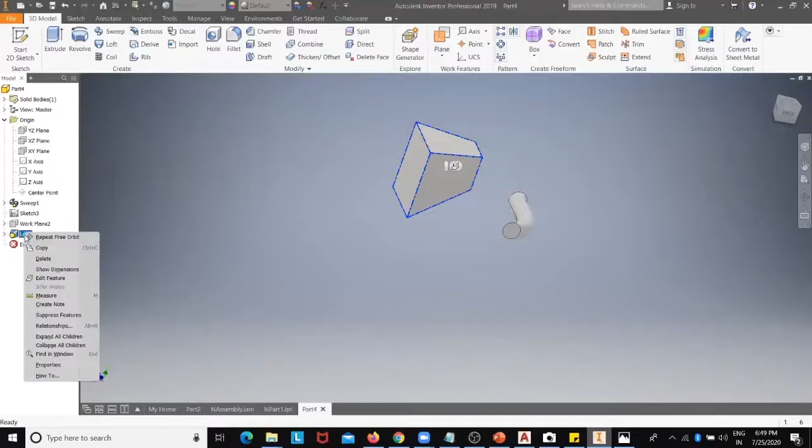Okay, there is another very interesting command, suppress command. Through suppress command, you can switch it off, switch it on at any time. Like this recently created loft command, I want to make it invisible, hide it - then I will just suppress this feature. See, it is hidden now. Again, I can unsuppress it - means I don't need to delete it. If I want to make the clear visibility, then I can just suppress it or unsuppress it. Okay.

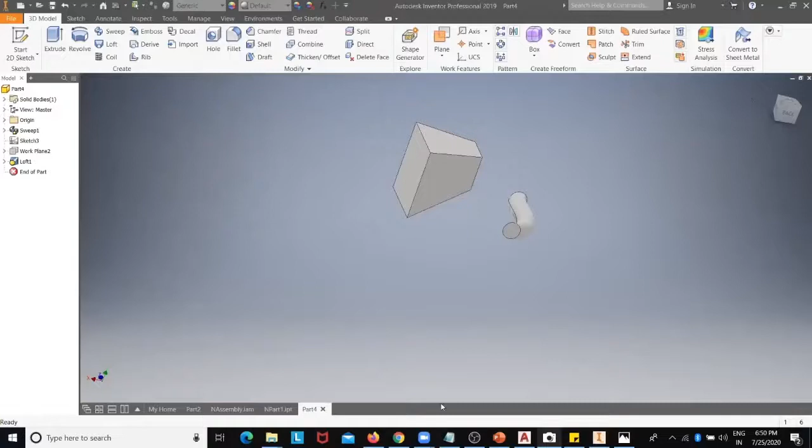Hello. Yes. Sir, can you give a previous example as homework to us? This one? Yeah, this one. Yes sir. But this is 2D image, this is not 3D. Okay, I will share it with you, and you can try it with AutoCAD and Inventor both as well. Okay, thank you. Any other queries?